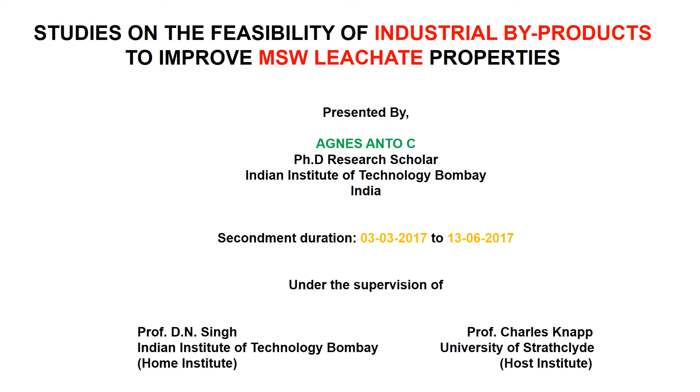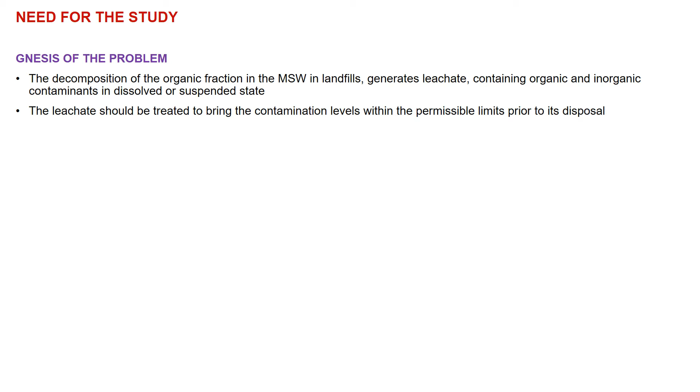My work during the secondment was on studies on the feasibility of industrial byproducts to improve MSW leachate properties. The need for this study, to begin with, the genesis of the problem. The decomposition of the organic fractions of the MSW, which is present in the landfills, generates leachate, which is a combination of organic and inorganic contaminants which would either be in dissolved or suspended state. The leachate should be treated to bring down the contamination levels within the permissible limit prior to its disposal to land or water bodies. For the same, different types of leachate treatments are available.

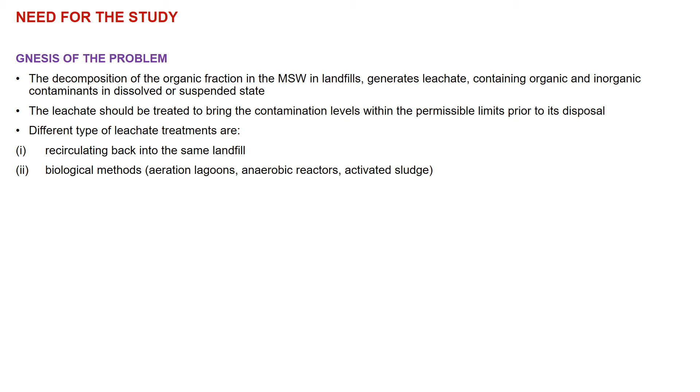Recirculating back the leachate into the same landfill, which is followed in bioreactor landfills. Biological methods using aerated lagoons, anaerobic reactors, or by employing activated sludge, which is rich in microbial consortium and makes the reduction of organic and inorganic contaminants in MSW leachates possible.

The third method is the physicochemical methods, which include flocculation and precipitation by addition of external chemicals, adsorption, say for example on activated carbons, oxidation using ozone, hydrogen peroxide or Fenton's reagent, membrane filtration, which uses a permeable membrane to mechanically separate the contaminants from the leachate, ion exchange using zeolites or resins, basically done for heavy metal removal from MSW leachates.

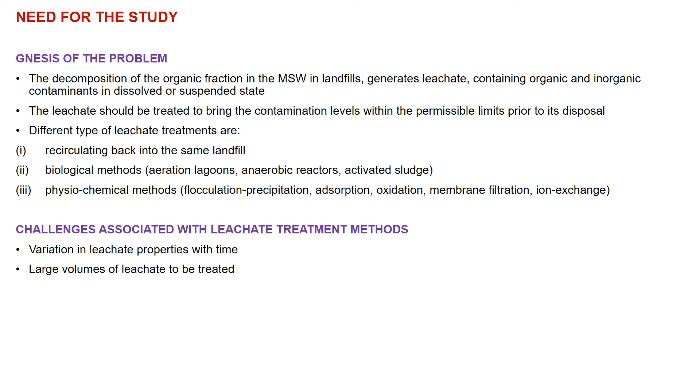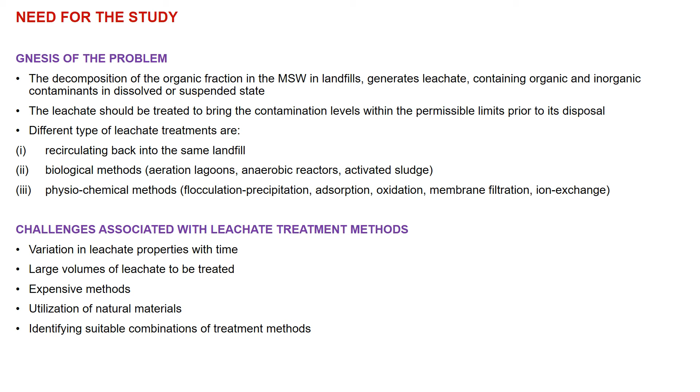However, these methods have challenges associated with the functioning. Few of them are: the leachate varies its properties from time to time, large volumes of leachate to be treated, the methods like membrane filtration, ion exchange, oxidation are expensive in nature, it consumes natural materials, say for example in flocculation, precipitation, the use of alum, ferric chloride, etc. And different types of treatment methods should be used in combination to achieve the leachates with contaminants within the permissible limit. So identification of the suitable combination of treatment method is also challenging.

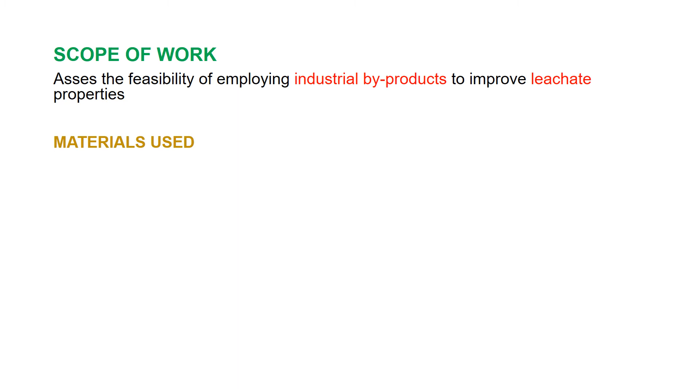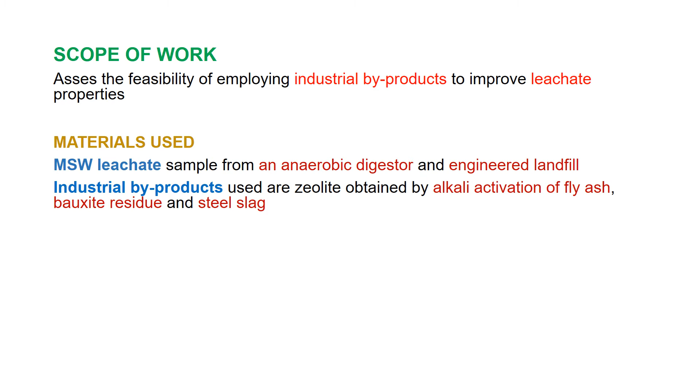Keeping this in mind, the scope of the work was defined to study the feasibility of industrial byproducts to improve leachate properties. Industrial byproducts are basically the waste which is generated from industries, which is to be discarded. Studying its feasibility to improve MSW leachate properties would be something beneficial. To carry out this study, the materials used were leachate samples, which were obtained from an anaerobic digester and an engineered landfill. The industrial byproducts basically involved zeolites, which were obtained by alkali activation of fly ash, bauxite residue from aluminum industry, and steel slag from steel industry. Apart from that, an additional natural zeolite mineral was also used for the study.

The methodology followed was characterization of leachates and industrial byproducts and zeolites, batch studies, which was used for studying the interaction of the industrial byproduct and zeolites with MSW leachate, and characterizing the final treated leachate which is obtained after the interaction.

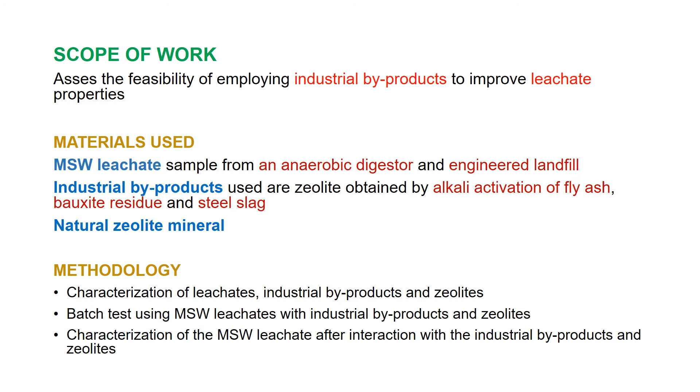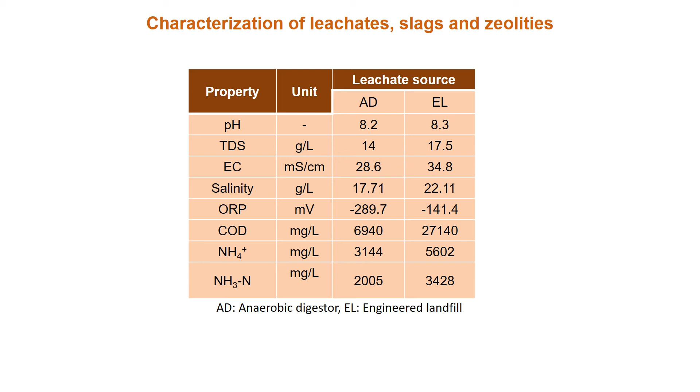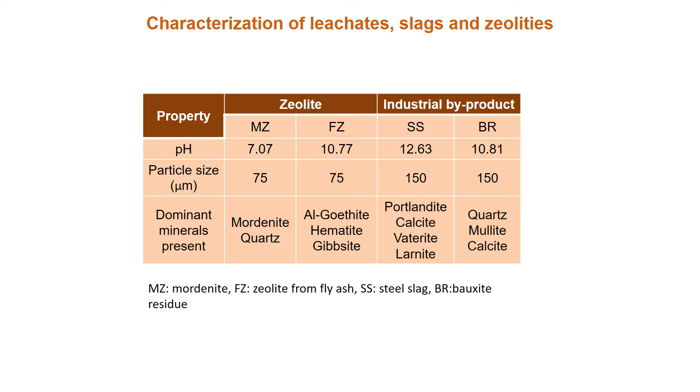The properties of the zeolites used and slags used in the study were: pH indicated the materials are alkaline in nature. Particle size used for zeolites were less than 75 micron, and for slags less than 150 micron. The zeolites used were a natural zeolite, which is a mordenite, a fly ash zeolite obtained by alkali activation of fly ash, a steel slag, which is rich in portlandite and calcite, and a byproduct from alumina industry, which is termed as bauxite residue, which is rich in quartz, mullite and calcite.

The methodology adopted for batch test was: leachate and slags and zeolites were proportioned in the ratio of 1:10 in glass vials. Samples were then subsequently incubated at 40 degrees Celsius in anaerobic conditions for 2 days. Later, it was closed airtight and then mechanically stirred for 9 days. After the interaction the samples were left undisturbed for a few hours so that the settlement of solids takes place. The supernatant was further decanted and stored at 4 degrees Celsius for further laboratory analysis. You can see the picture of glass vials which had leachate plus slags and leachate plus zeolites in the proportion 1:10.

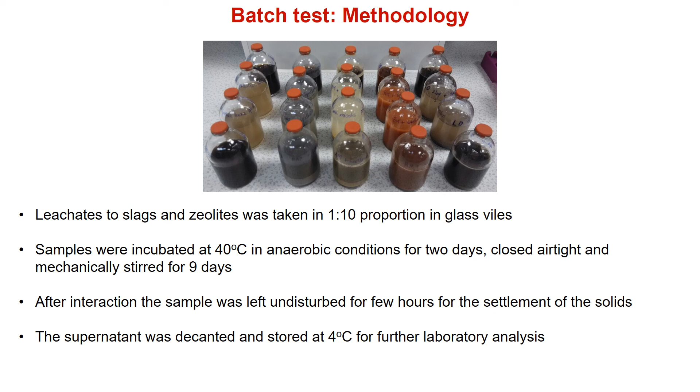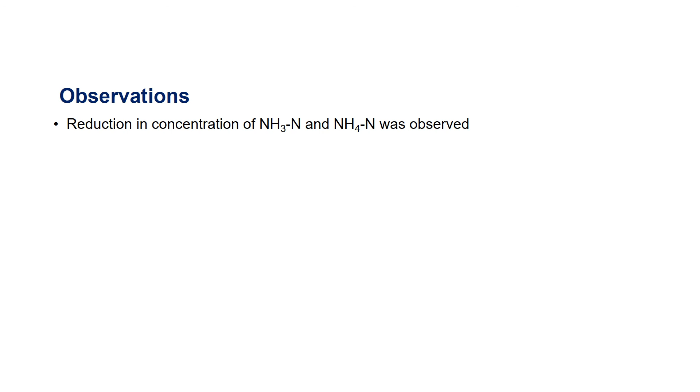The observations from this study were: there was a reduction in ammoniacal nitrogen and ammonium ions. Not much reduction in COD was observed. There was reduction in total dissolved solids, and the maximum reduction was seen in using steel slag compared to zeolites, whereas there was an increase in TDS when bauxite residues were used.

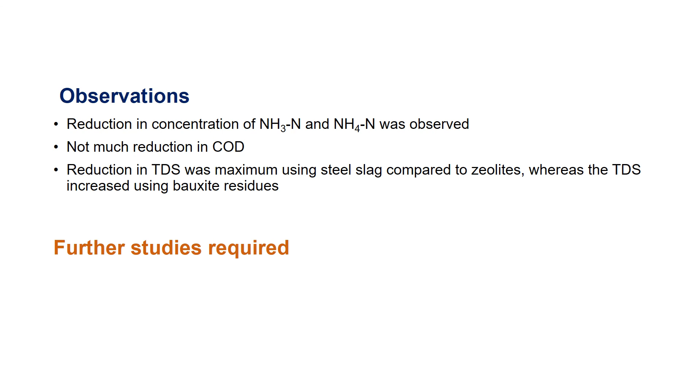The further studies required in this context are: optimum liquid-solid proportion should be established. Interaction time also should be established so that the maximum removal of contaminants is possible, and the overall kinetics of the process is to be established.